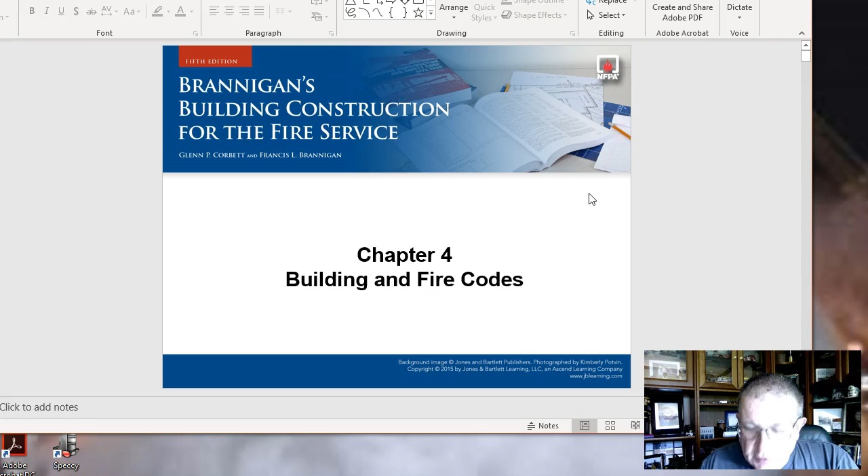Chapter 4 is about the building codes, and one of the things you got to keep looking at in Chapter 4 is all the different histories that go on with building codes and the basis of the building codes, and explains the difference between the fire and the building codes. There is a difference, and the construction codes and how they all have an impact on the fire service.

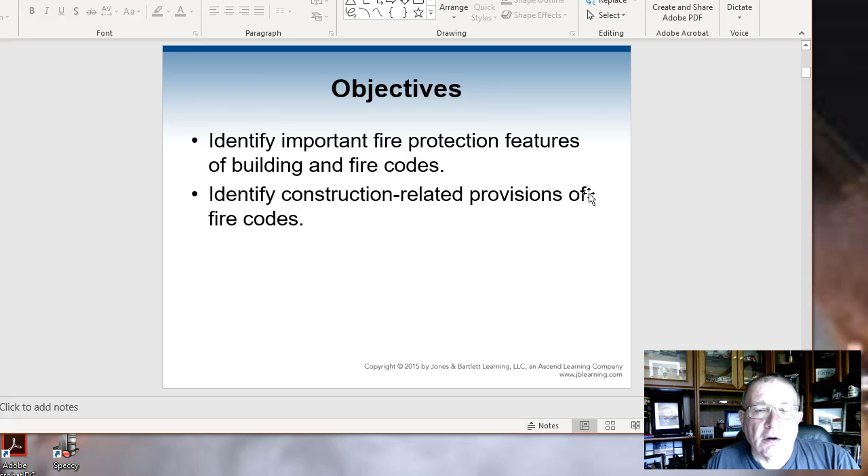Objectives are pretty much the same. The fire protection systems and building and fire codes are all about basically saving lives and living in an environment.

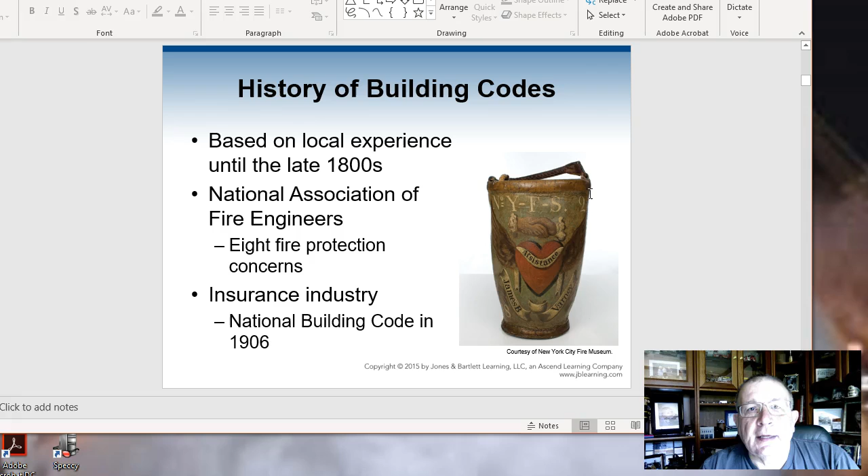The building codes history goes back to the late 1800s. The National Association of Fire Engineers and eight fire protection concerns all came apart. But the biggest thing was the insurance agency realized one thing, that they need to have a code that makes sense. So the model codes were developed, and so came about the National Building Code, the Uniform Building Code, the Standard Building Code, and of course out of all that came the International Code Council, which exists today.

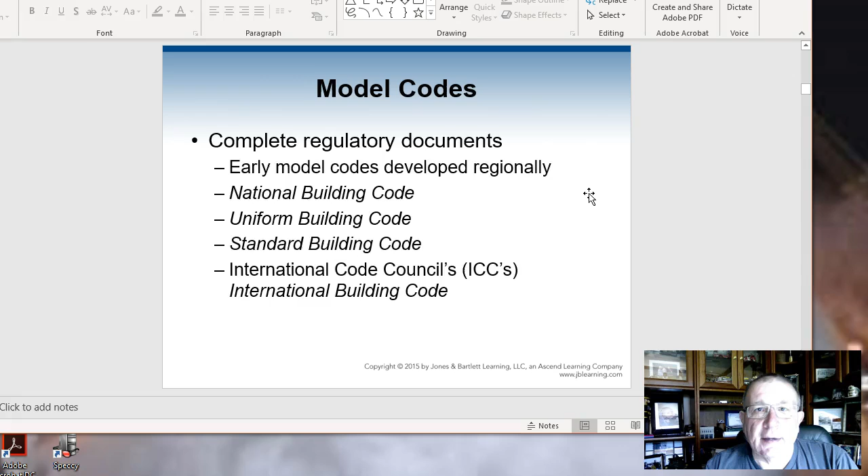Older codes were regionally adopted, but are no longer produced. Fire codes today generally have an update every 3 years, and they're all based on the standards. And if you know about the standards, it comes out of NFPA and the various testing agencies that support those standards.

Fire code regulations are to be employed on the fire service after the building is built. Basically, I tell everybody, we never get a divorce from a building. We inherit it till the day it goes on the ground. And I think the biggest thing I can tell everybody is that if a building is built bad from the beginning, the fire department always has to deal with the inspection headaches that go with that building.

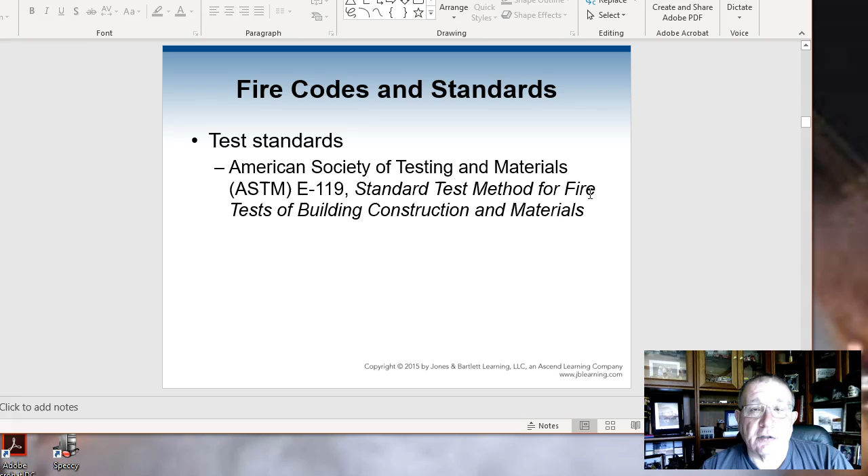And again, the fire codes and standards are updated every 3 years. Testing standards is the American Society of Testing and Materials. ASTM E119 is the testing method for all construction materials, but it does change by standard of testing.

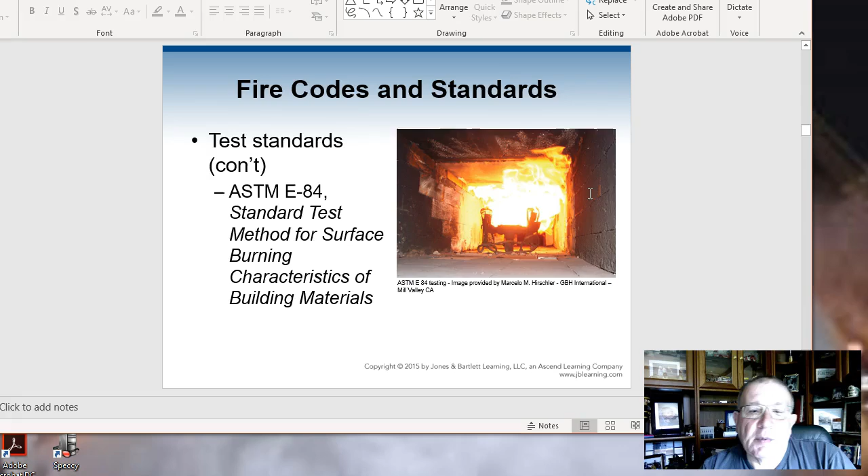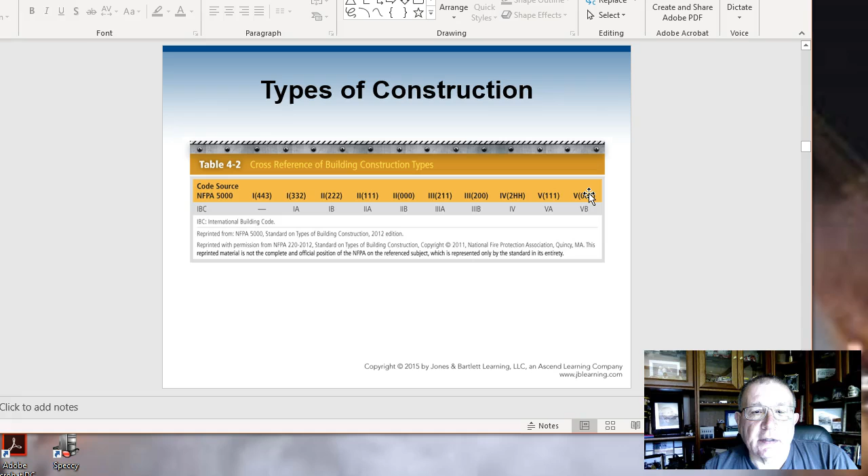ASTM E84 is the fire surface, or the surface burning characteristic, and that's also used to determine what type of building materials are out there. Construction codes have come into the International Building Code, NFPA 5000, and of course the hybrid buildings that are out there. This kind of gives you an example of the codes and the references, and I direct you to the text on that.

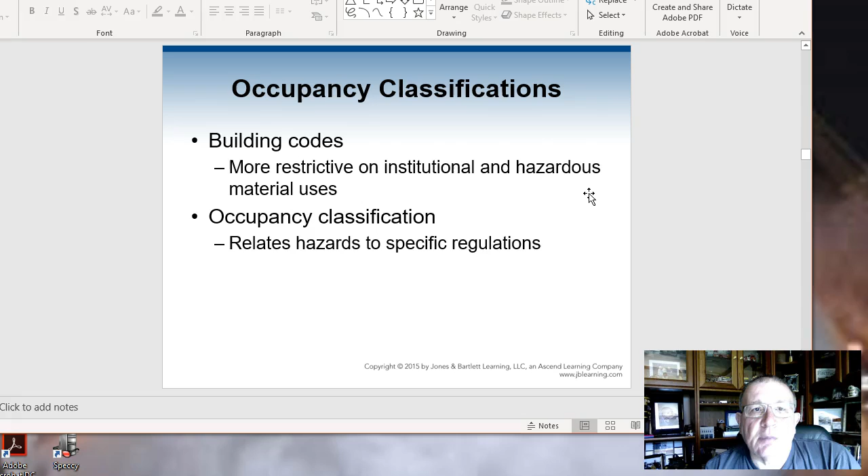Occupancy and classifications of building codes, and how are they employed by the occupancy and the type of building that's being built. You got to remember A1 through A4, B and E, E being educational, B business, F1 and F2, and then H1 and H5 being high hazards.

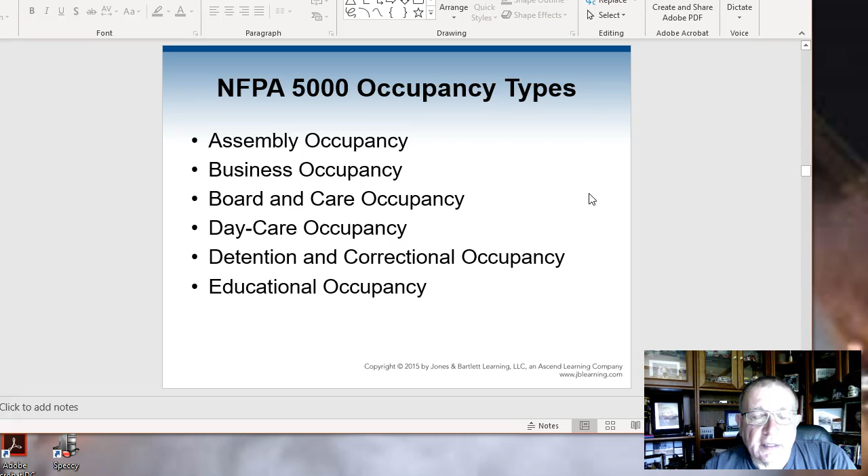But the biggest thing is A is for assembly, B is for business, D is for daycares or detention and correctional occupancy, and E is for education. 5000 types are healthcare occupancies, high hazard contents, industrial occupancy, mercantile, residential, and storage.

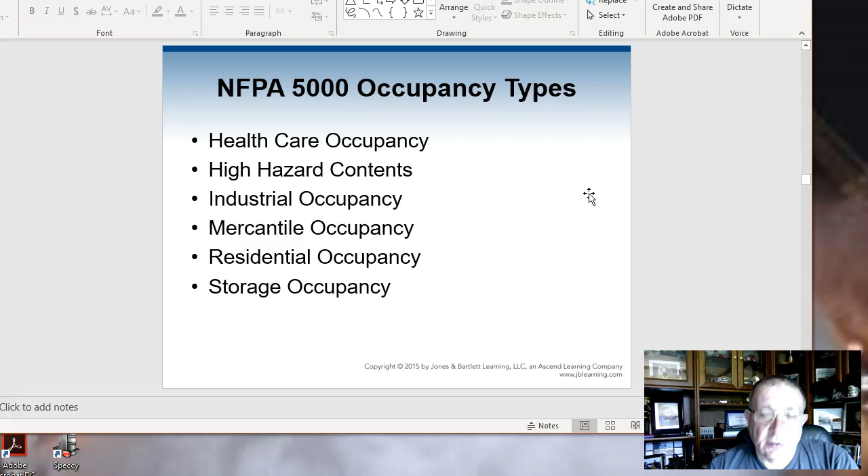Building height and size are required under various codes, and also local zoning controls the height of the building. So don't forget that.

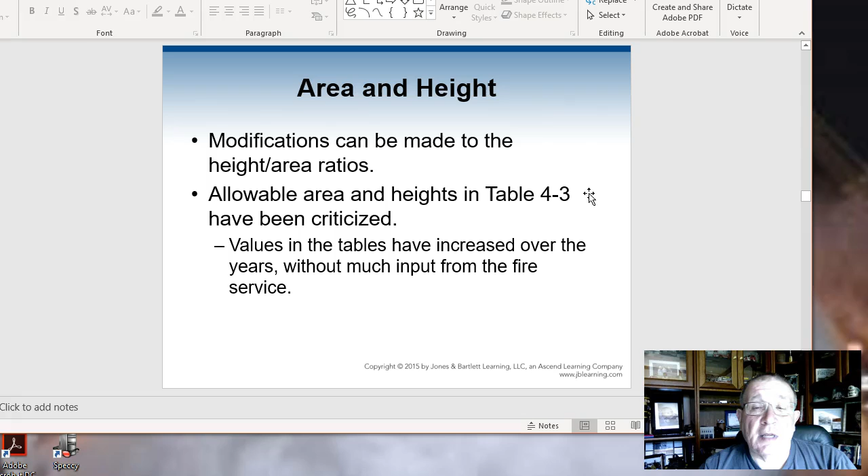Modifications in the tables that are there. One of the things that's changed in the building code that I can tell you right now is we're now building high-rise buildings again, more than 4 stories. Most you'll start seeing 6 and 8 story buildings being built out of wood construction.

Table 4-3 kind of lends you to how the construction type is, 1, 2, 3, 4, and 5, and the hour rating as needed.

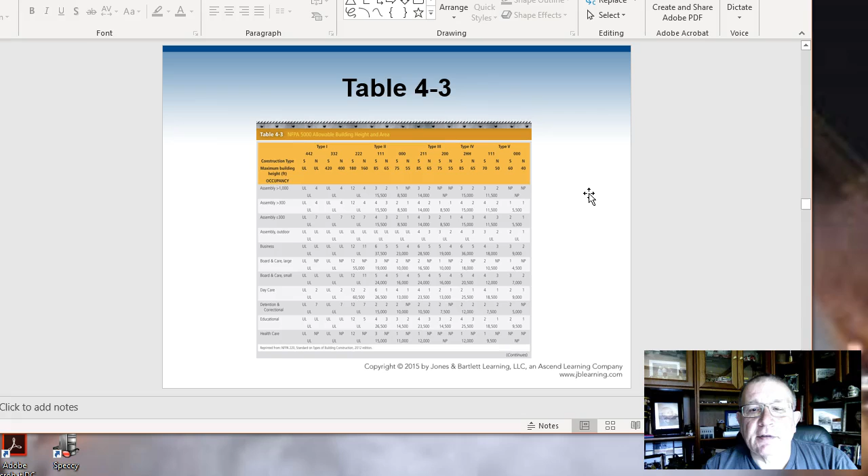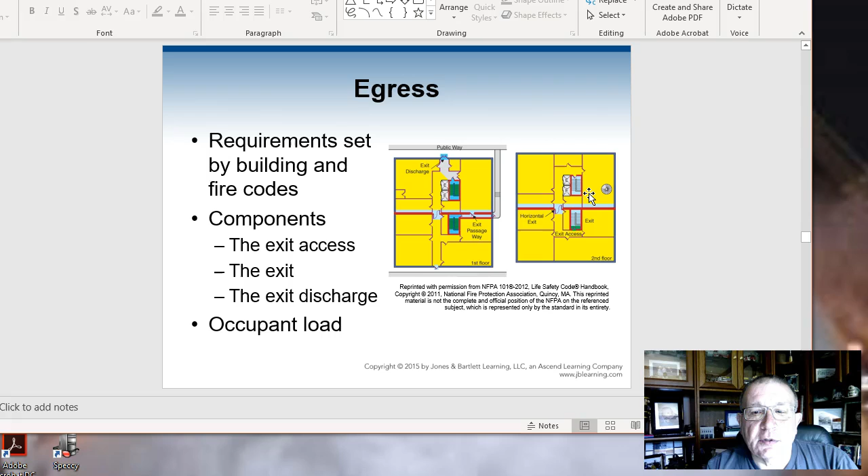One of the biggest things is special hazards. You have special structures such as atriums. You got your high-rise structures. You got your open mall spaces. You got egress issues with all these buildings. What's a good way for the flow pattern out of the building? But more than anything else, you have to look at the occupancies, how they're rated in the building, and the type of load that occupancy can handle.

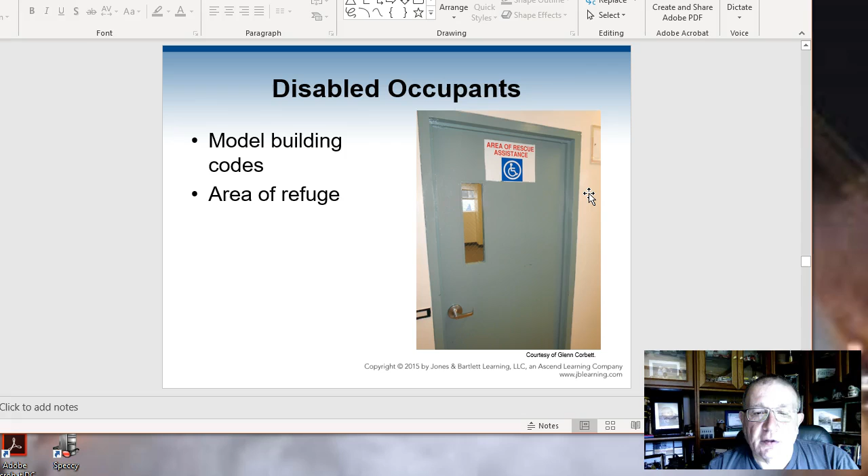Areas of rescue assistance are there, but the biggest thing you have to look at with all this is what is the purpose of the building and how are people going to get out.

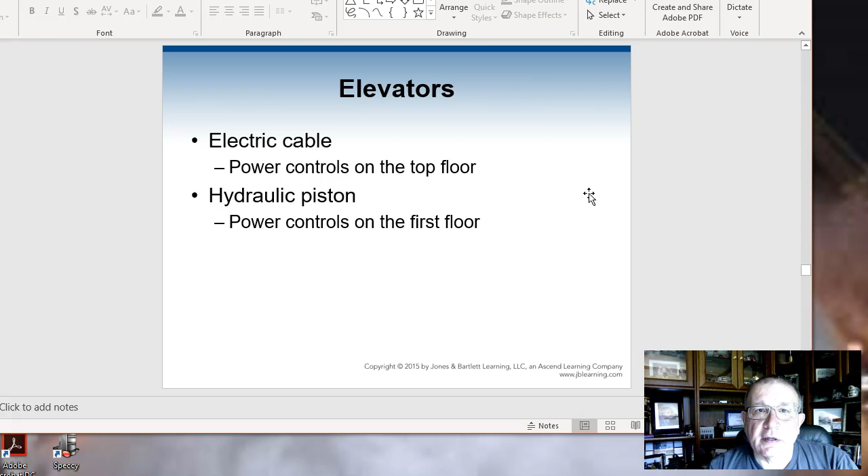Again, fire protection systems, the way that goes. Elevators are key. Is it a hydraulic elevator or electric cable? It all depends on the height of the building and the purpose of that elevator. You're not going to use a cable elevator on a 4-story building, you're going to use a piston type. But you're going to use a cable elevator on a 6, 7, 8, or 10-story building.

Phase 1 operations is for recall. Phase 2 is for the fire department, so they have access to the upper floors.

Elevators, post 9/11 changes: occupant evacuation elevators, illuminated usage signs, protection against water penetration, two-way communications, and recall from a fire command center were all changes that happened after 9/11.

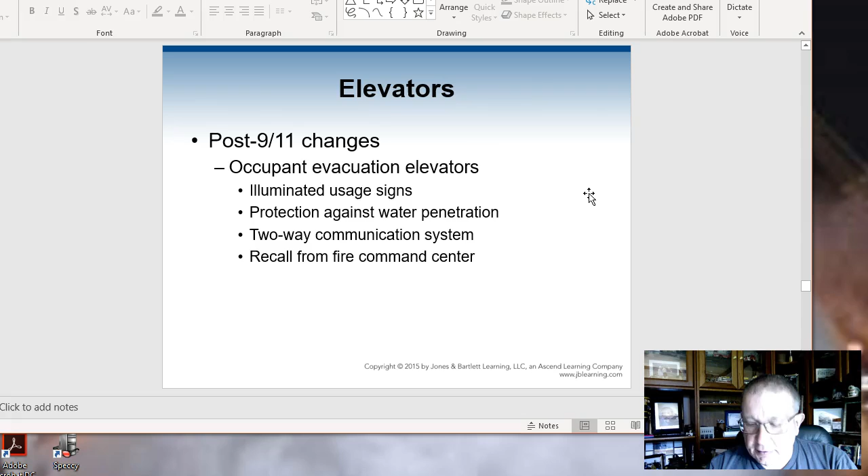9/11 also brought about eliminated hoistways, a minimum 150 square foot lobby, and class 1 hose outlets in the stairwells.

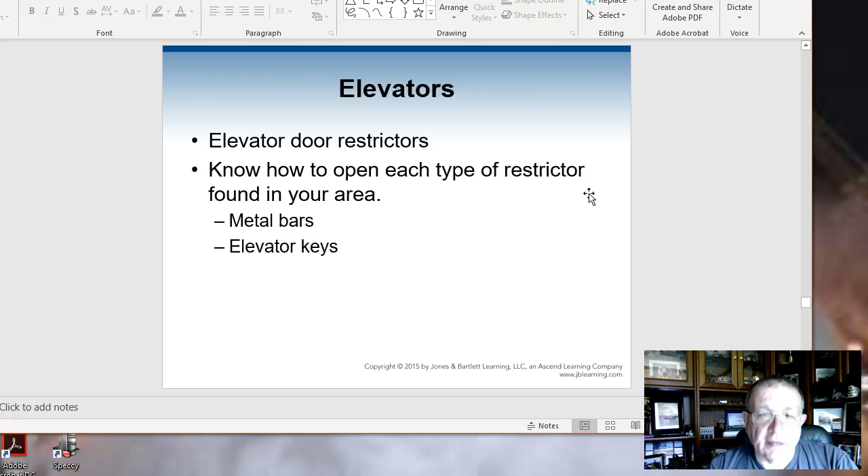Elevator door restrictors. You need to know how to open each type of restrictor found in your area: metal bars, and elevator keys. The building code itself provides a lot of good information, and I direct you to read that.

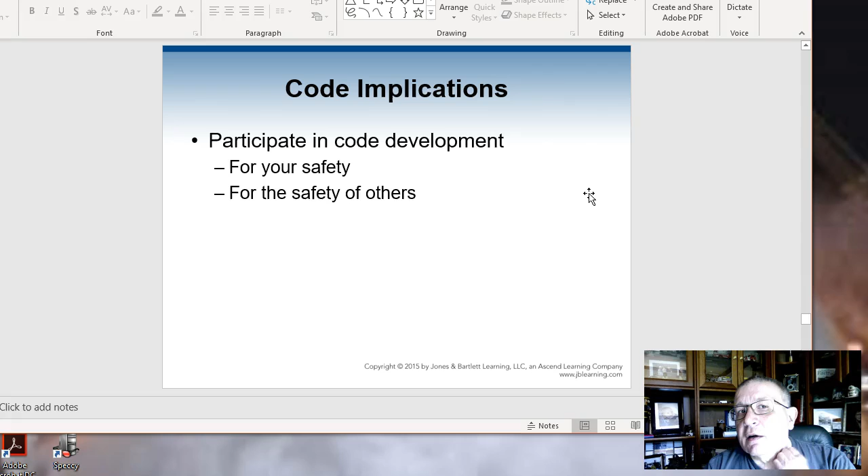And code implications. What happens when the code doesn't address your concerns? You have to go through research, and what you do with that is assess the proper code to the NFPA findings and how that comes out through code, fire code regulations, and also through the standards. The standards sometimes dictate how the code has to be applied.

So in chapter 4, you're looking at what are the subsequent regulations and what's going on and how they've been applied in towns and cities. This is a good example, quite frankly, of a quick summary of what you're going to see in this chapter. You need to read the chapter and understand what you're doing here.

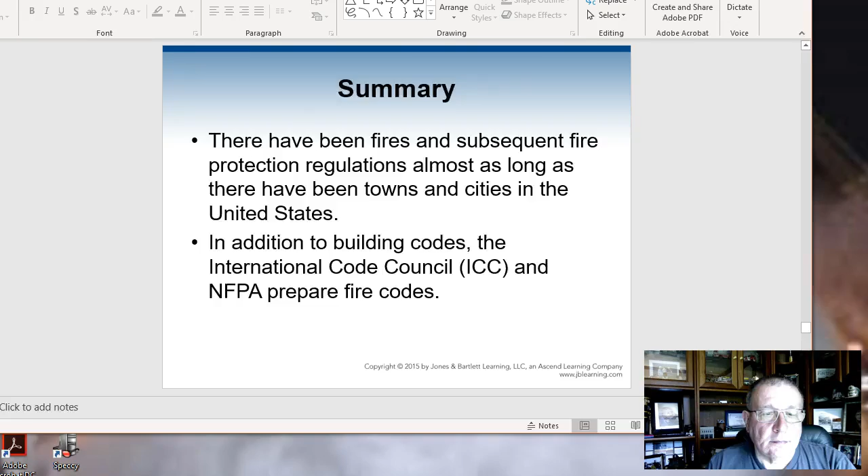Okay, we're going to start out with chapter 5 here, fire behavior and building construction. It's pretty much an add-on to what we dealt with in chapter 4, but you're going to start looking at some things a little different.

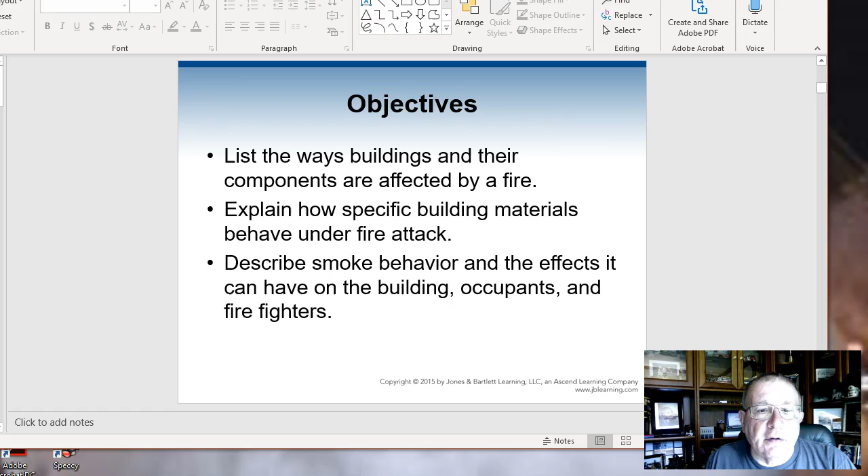The objectives here are the fundamental behavior and the key to fire phenomenon. The big thing here is to list the ways buildings are affected by fires and the specific materials that behave under attack of fires. So we go into basically the fire behavior elements here.

I'm not going to get into a long lecture on this, basically this is in your book. But the heat transfer is really important. This is a good example of conduction, convection, and radiation.

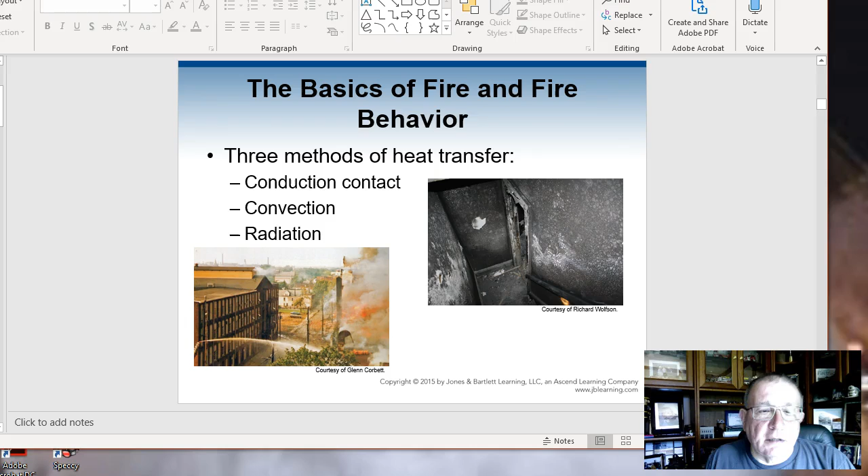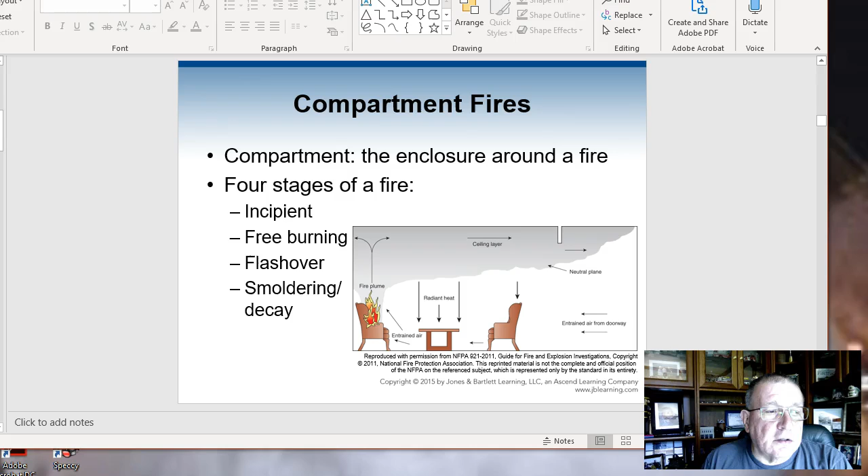Compartment fires basically involve the incipient free burning phase, flashover, and smoldering decay. So those are key elements that you're going to see in the basic concepts of fire behavior.

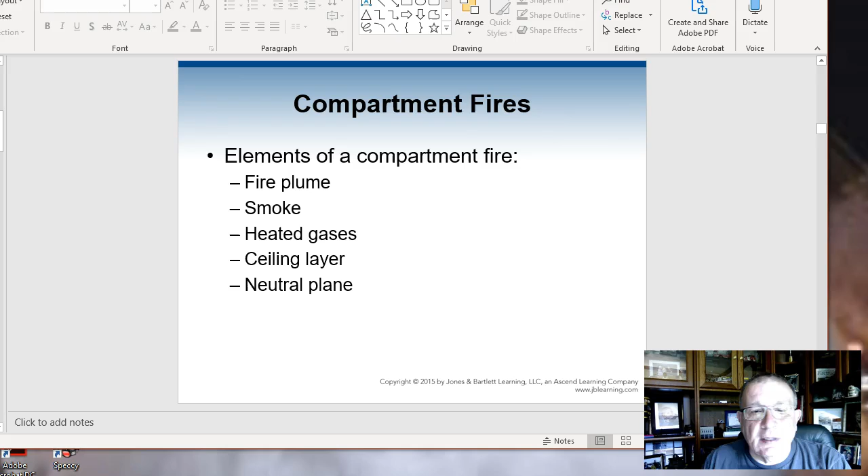One of the big things you have to look at is a fire plume, smoke, heated gases, ceiling layer, and the neutral plane. So when we look at these things, here's a good example of a working fire in an apartment building.

But the big thing is, more than anything else, you must consider all the tactics that go along with fighting compartment-type fires. You've got to look at the interior combustibles, the vertical openings, the height of the room, proximity of walls with each other, and HVAC systems.

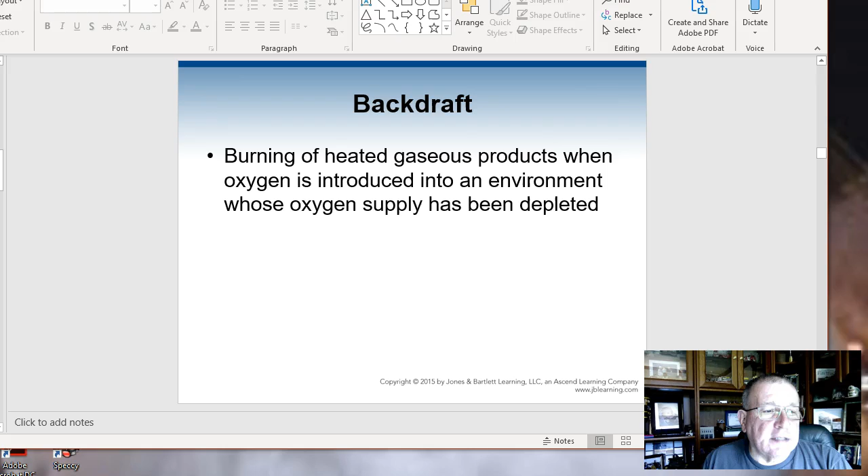Today's fire service, I will tell you this right now: in lightweight construction, it doesn't matter if it's steel or wood, anything lightweight construction. The rapid spread of fire in a building like that leads to one thing, a rapid collapse, and you've got to be very careful. You've got to understand that those components are combustible enough that they can turn around and deteriorate right in front of you, and as an entry crew and a firefighter, you could have a very dangerous situation.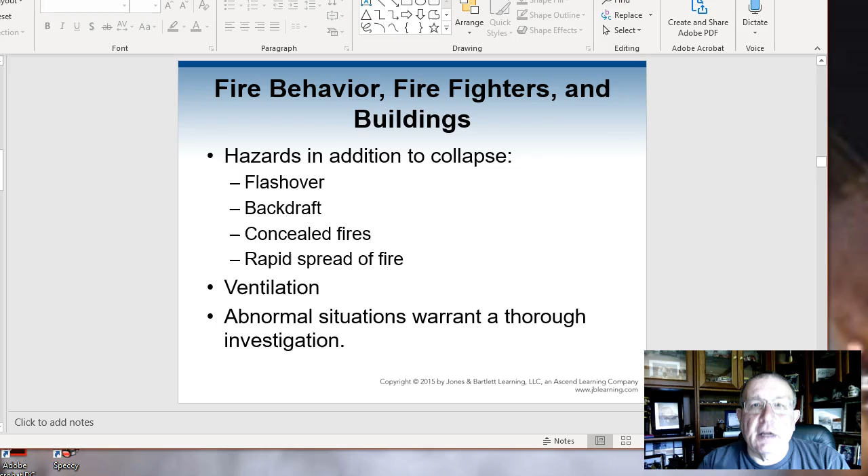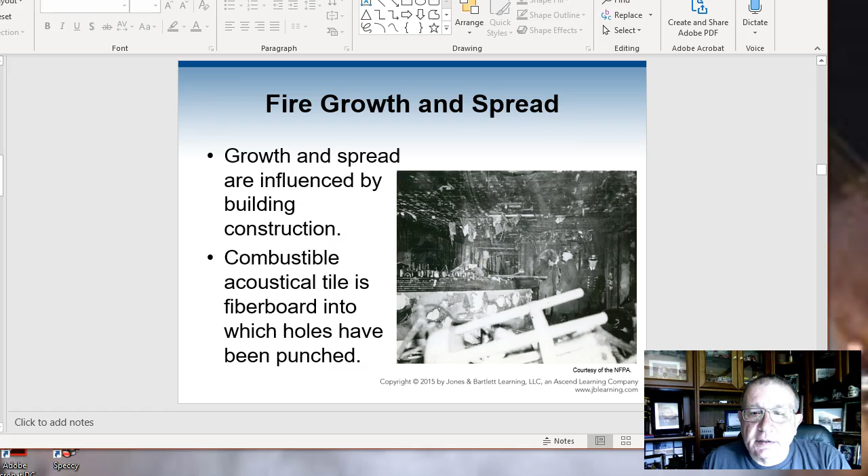This kind of gives you an idea of what happens when fire grows and spreads. This is the aftermath that you'll see, a picture of basically what happened after a fire there. In your book, you'll have the MGM fire, you'll also have the famous Coconut Grove fire, how fast that fire grew and the loss of life that went along with it, along with Beverly Hills in 1977.

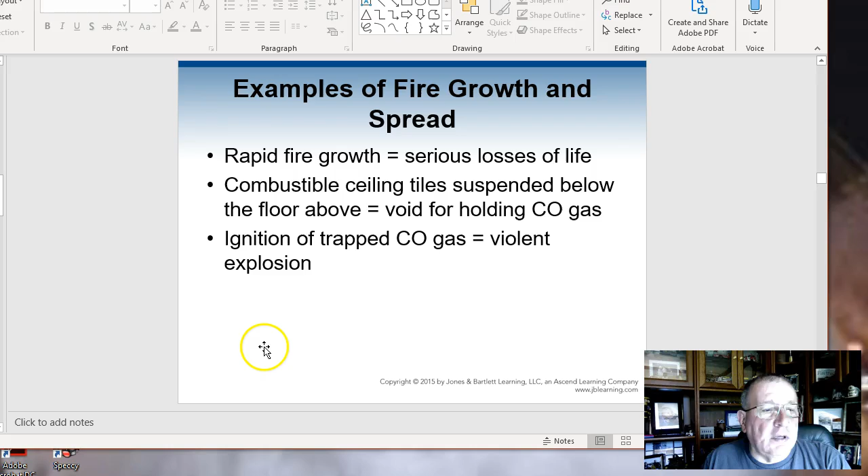You got fire hazards, and the list goes on. As you go through this, you look at your finishes, and you're looking at more than anything else why some of this comes back. Years ago, the big tents were put up with fabric, cork, rattan, and wood, and then they have a fire breakout, and people are dying because it collapses very quickly.

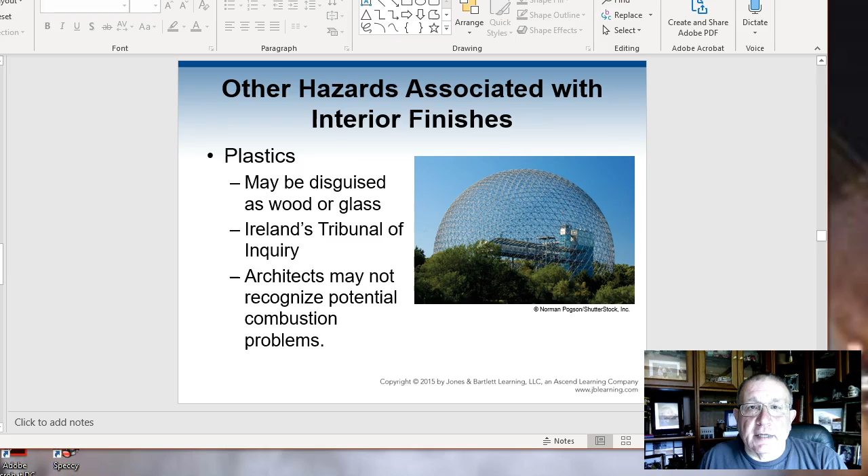Plastic is now one of our biggest problems. If you're looking at hydrogen cyanide, it's just generated from plastics. It's thick, it lays in the air, but you also have SO2 and other sulfides that come about from incomplete combustion. Look at the woods you see today or the cosmetic furniture you can buy. I hate to say it, at places like IKEA or any furniture store, there's a lot of plastic and polycarbonates involved.

Here's a good example of a Cold Storage fire that killed firefighters in Worcester, Massachusetts in 1999. This was caused by vagrants in the building. It was an empty building, but yet we lost 6 firefighters.

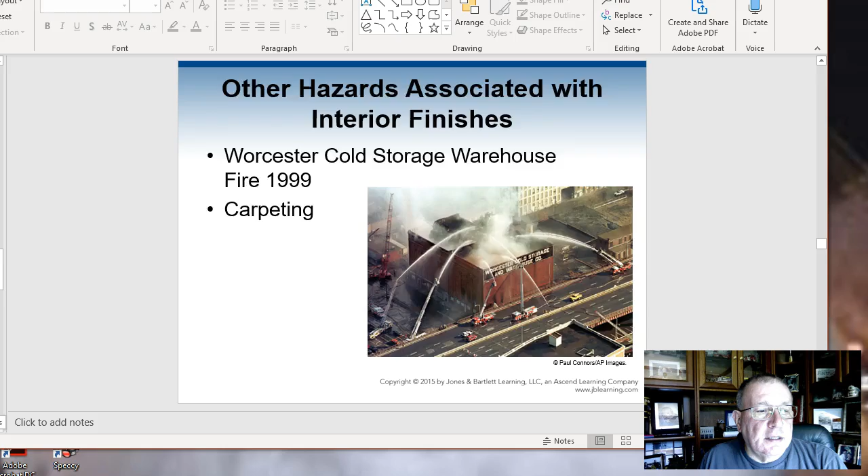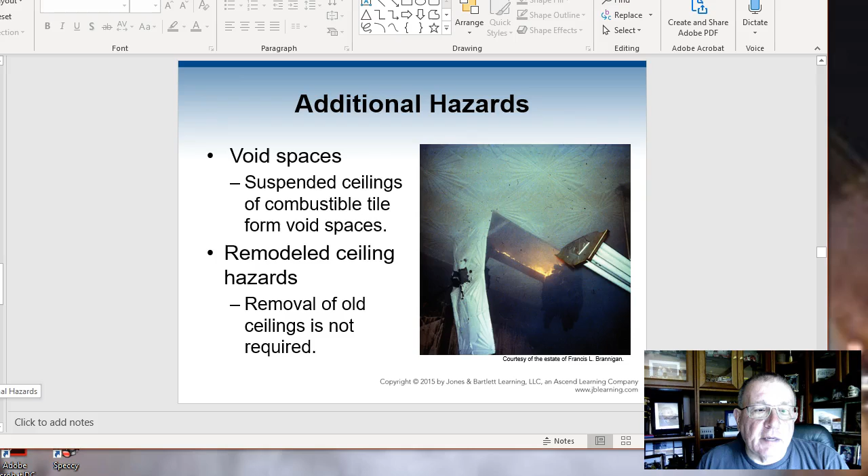In the case studies that I present to you in this whole array of building construction, it's always centered around a line of duty death. And the reason why is because mistakes are made. I'm not here to point the finger, I'm not here to say this was right or wrong, but I'm pointing the finger at the building. So when you start reporting on this, start thinking about the building and what happened with the materials. You'll be surprised how sometimes we just walk away and don't even look at what we just walked into or walked out of. We get blinders on.

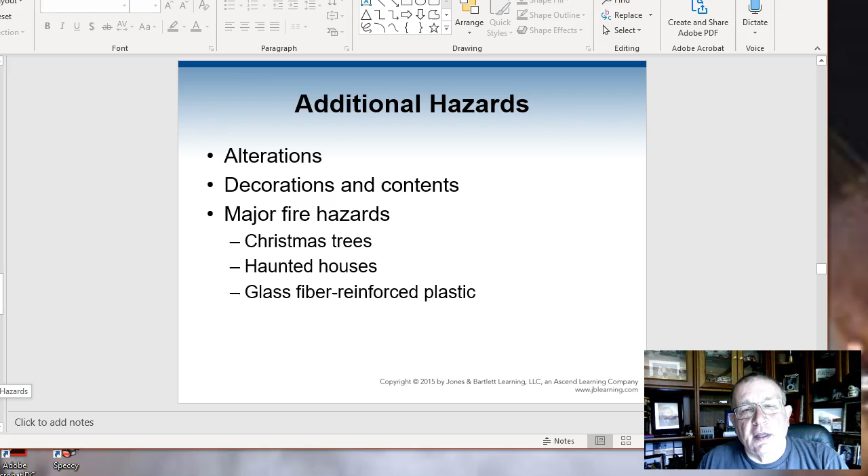Today's office buildings, you got a lot of cubicles going on. So the big thing is now you got additional hazards with decorations, Christmas trees, people making haunted houses, glass reinforced plastic in the houses and that. But today's fire load and the heat of release is greater today than when the fire codes were basically put into written form. First Interstate Bank fire, hotel remodeling, regulations in California, Boston, and the Port Authority of New York and New Jersey all have different takes on what they want to see in their fire protection.

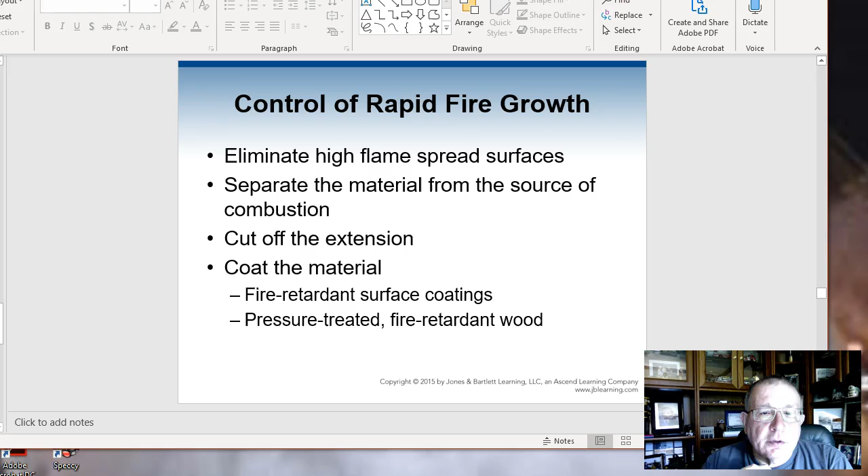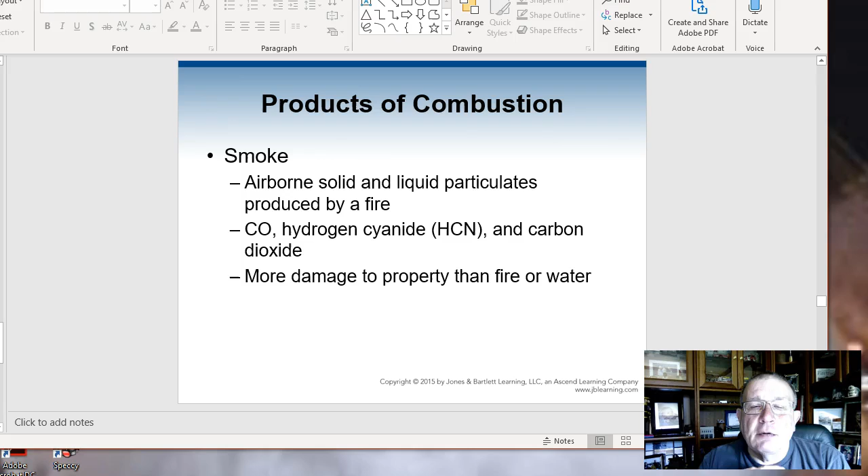Control of rapid growth is important, but the biggest thing, more than anything, is know your products of combustion. Smoke tells you a lot. Airborne and liquid particulates produced by fire, hydrogen cyanide, carbon dioxide, CO poisoning. More property damage can be done with water than with fire.

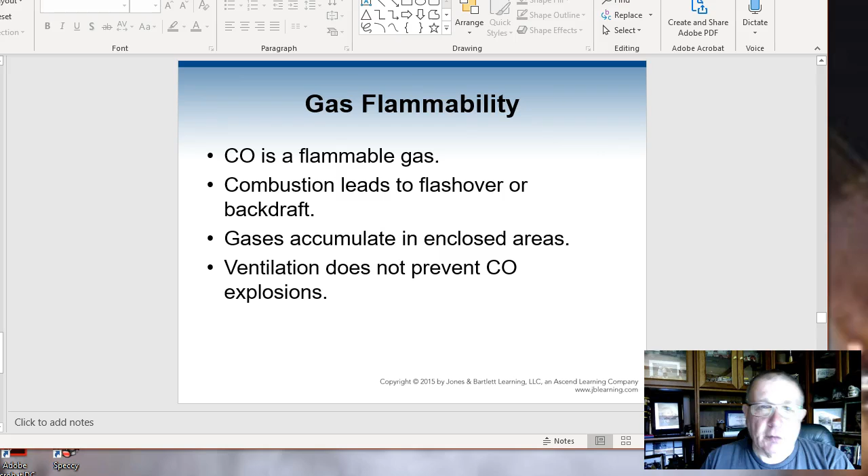CO is a flammable gas taken to the right ignition temperature. Combustion leads to flashover and backdraft. Accumulated gases in the closed area of ventilation do not prevent CO explosions. You got to look at this. You got to ventilate a structure the proper way. You also got to look at what's burning, and how these gases are going to build up on you and how quick they can turn the tide in a structural fire.

You got to look at the physical effects on people. CO is odorless and tasteless, and smoke particles can prevent air from filtering through properly, causing people to lose their sense of direction, and so on and so forth. Smoke damage may be the most expensive byproduct of fire. It's everything. You have a smoky fire, everything's basically destroyed.

Contamination by radioactive material, polychlorinated biphenyl, PCBs are very dangerous and very costly to clean up. A nuclear plant in Hanford, Washington, the cleanup probably costs more than the plant itself, all because of the toxic effects of PCBs.

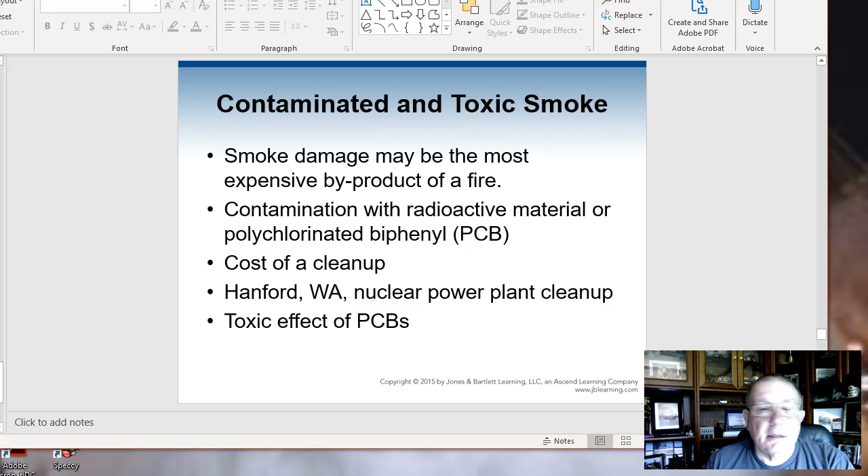Summary: fire behavior is critical for all firefighters. The biggest thing is that you have to look at the associated risk with fire growth, high flame spread materials. Biggest thing is, more than anything else, look at the strategic events of a fire, how the fire has grown and where it's going and what's going to happen.

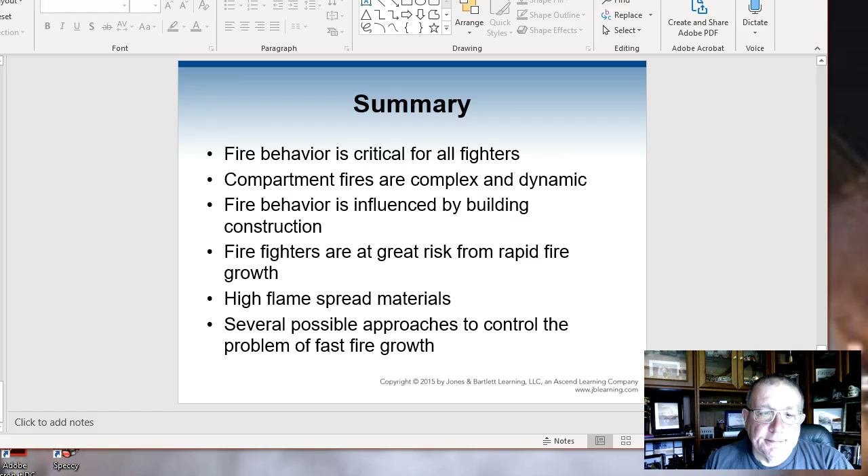This is chapter 5. Chapter 6 is a very long PowerPoint slide presentation, and I'm not going to go through the whole thing.

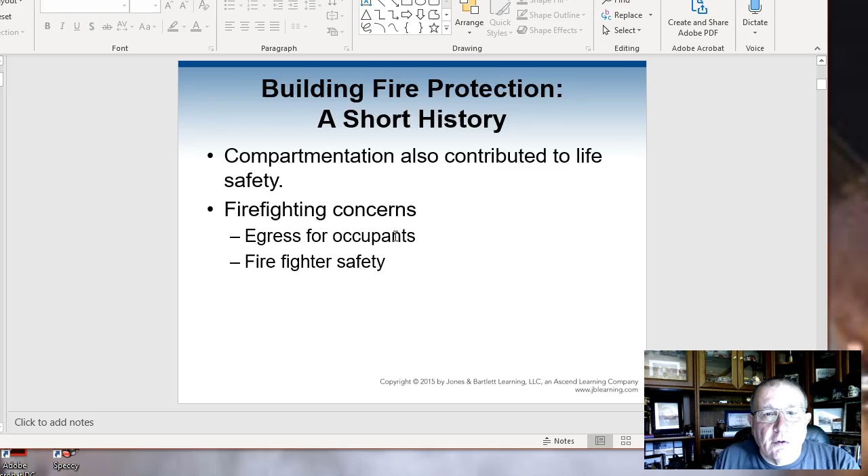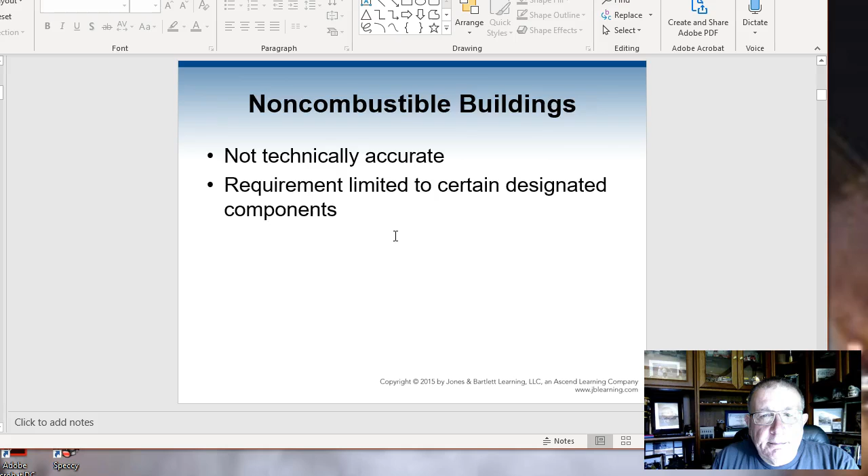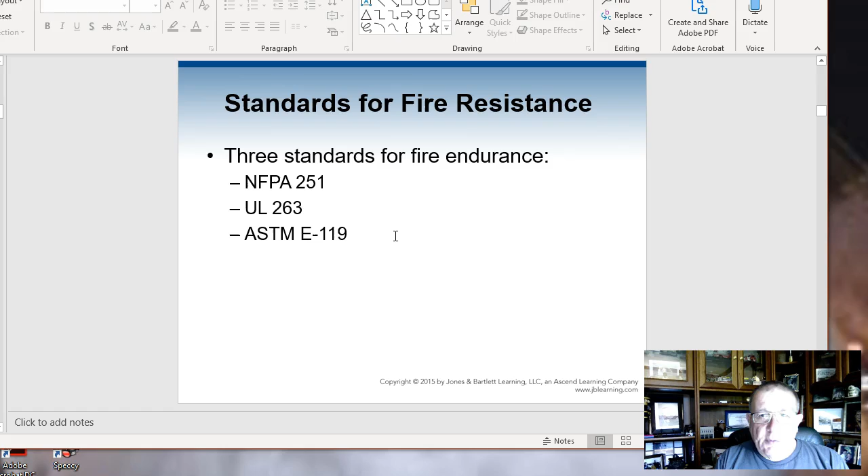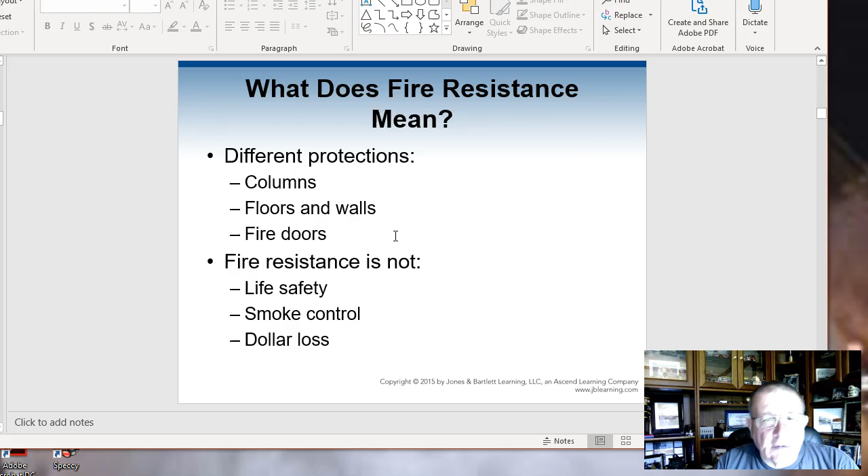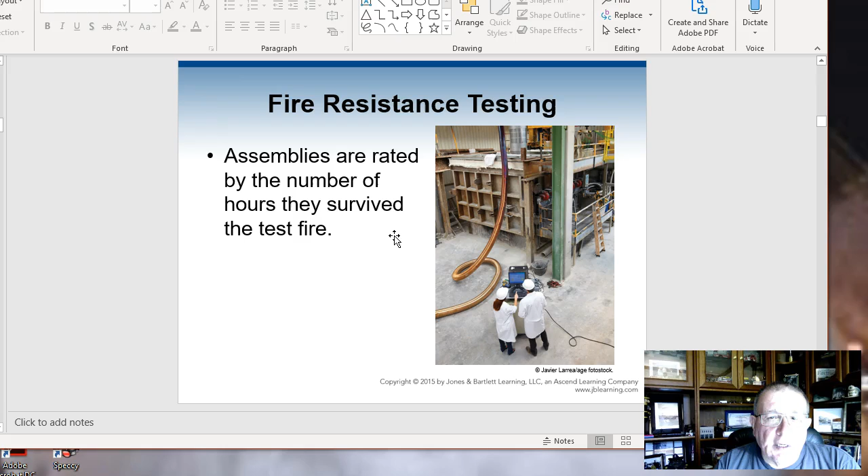Columns, floors, walls, beams, fire resistance, life safety, smoke control, dollar loss, everything is important. There's a good slide in the book, slide 18, in regards to fire resistant testing and how things are done, and it gives you a good example where that goes through.

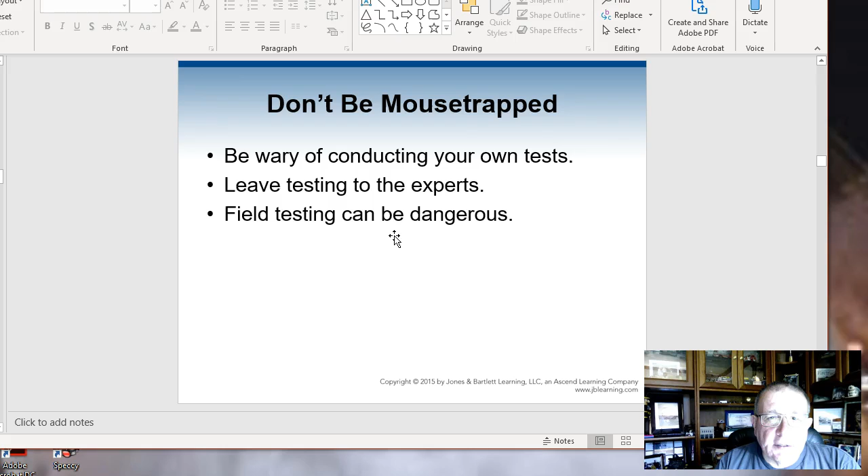The big thing is, as I go through this chapter very quickly with you all, this is just a snippet of what you have in this chapter. You have to look at fire containment systems being installed, fire dampers. Buildings have fire dampers in them. There's a massive amount that goes into the ductwork in regards to the HVAC, so it can stop the flame spread of fire through a duct system.

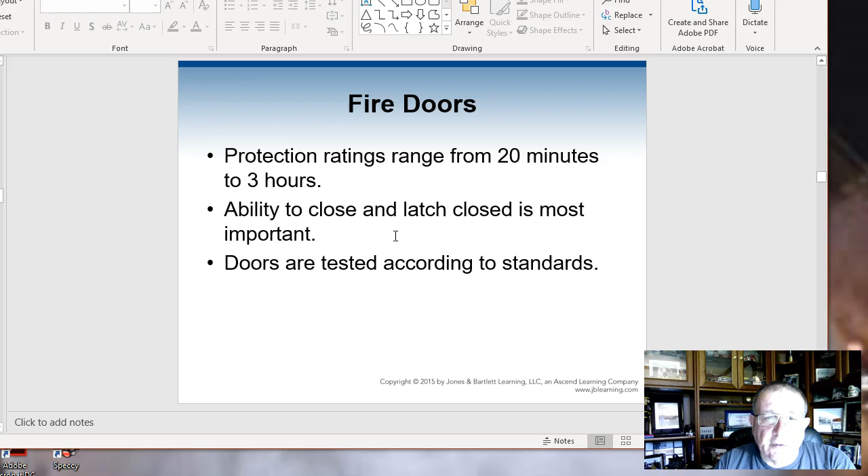Fire doors have to be rated, and they need to be in any commercial structure. Generally, you'll see fire rating doors at 2 to 3 hours. A good example is a swing door like this with panic hardware on it. Big thing is overhead doors and rolling doors. These are all part of this, and so is the closure on the building.

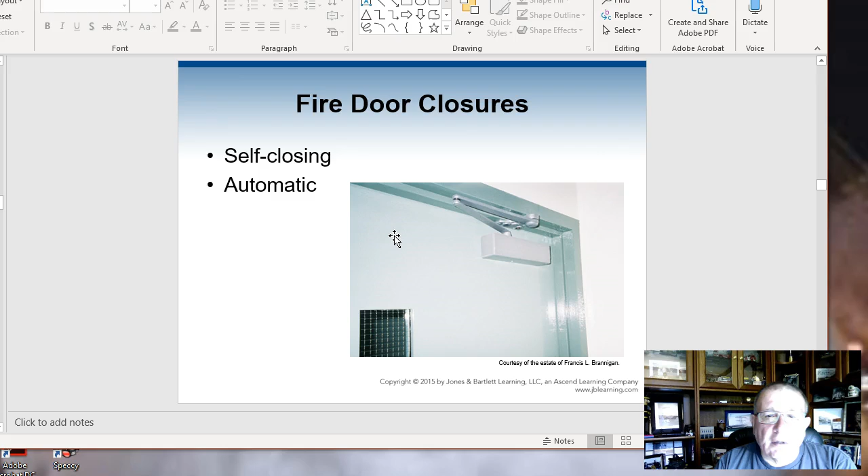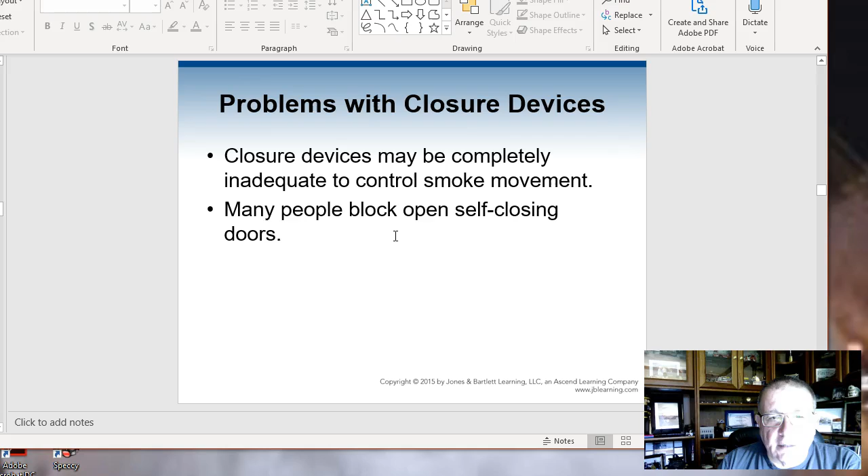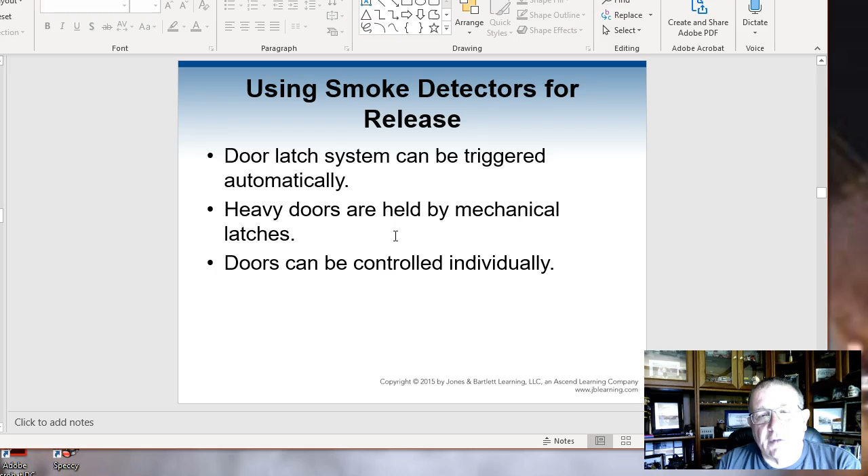So you've got all these to deal with. Problems with closures - what happens generally in a real smoky environment is they become sticky. They stick and are hard to open up. And sometimes people block open self-closing doors. The problem with that is when they block it, it makes it very difficult for the door to react the right way, what it's designed to do.

The other thing is stairwells. People like the little wedge things in stairwells and put stuff underneath the steps. Case in point, it's all part of a system that can't endure storage underneath of it. It's designed to stay open so that it's free of any type of fire threat.

You have smoke barriers in buildings, and most buildings today are now smoke-free under the laws. So we have all that. Escalators are important - you've got to understand what they do, and you do the compartmentalization.

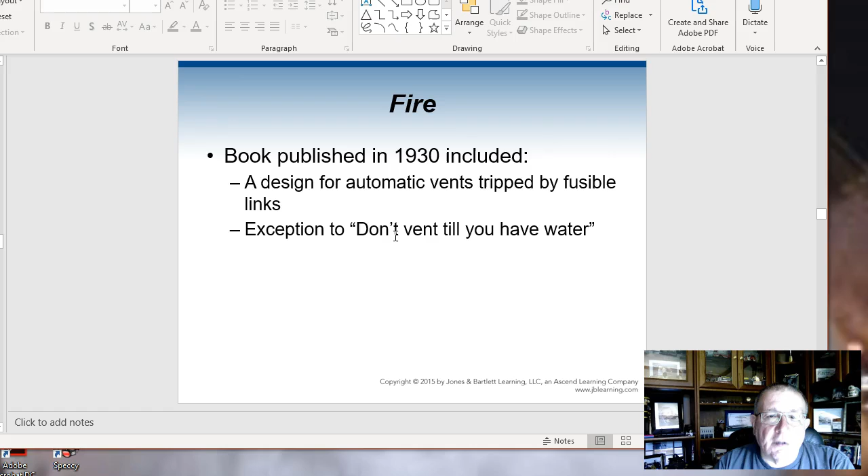The book published in 1930 was called Fire: The Design for Automatic Vents Tripped by Fusible Links.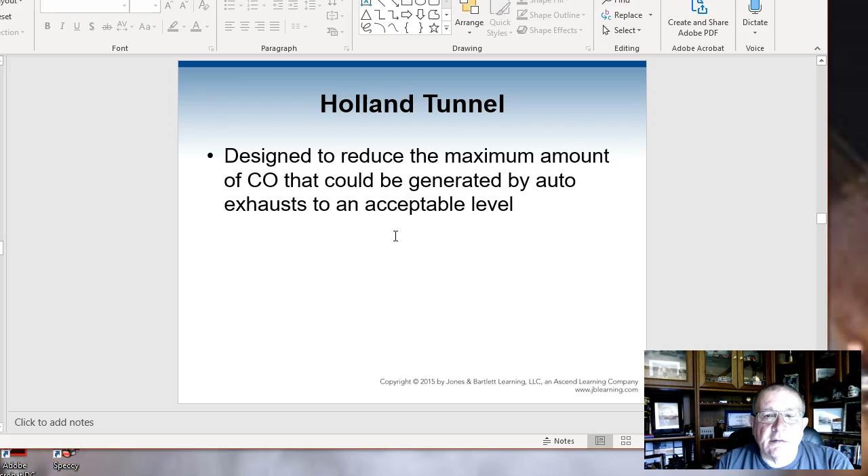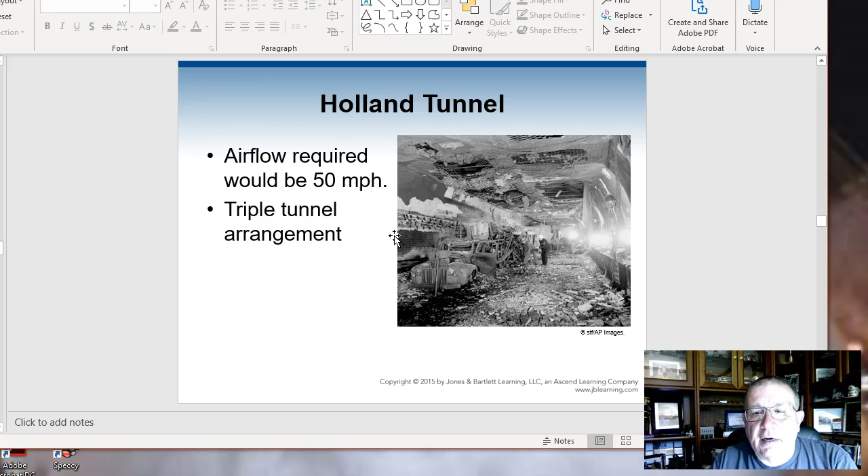Big thing is the Holland Tunnel. There's some interesting comments about the maximum amount of CO to be generated by an automobile and what was the acceptable level because of pressurization. Here's a good example of what happened in the Holland Tunnel. It required an airflow of 50 miles an hour, a triple tunnel arrangement, and they had a fire and basically closed the tunnel, and it had to be redesigned.

The Eurotunnel is an extensive design. You have to look that up.

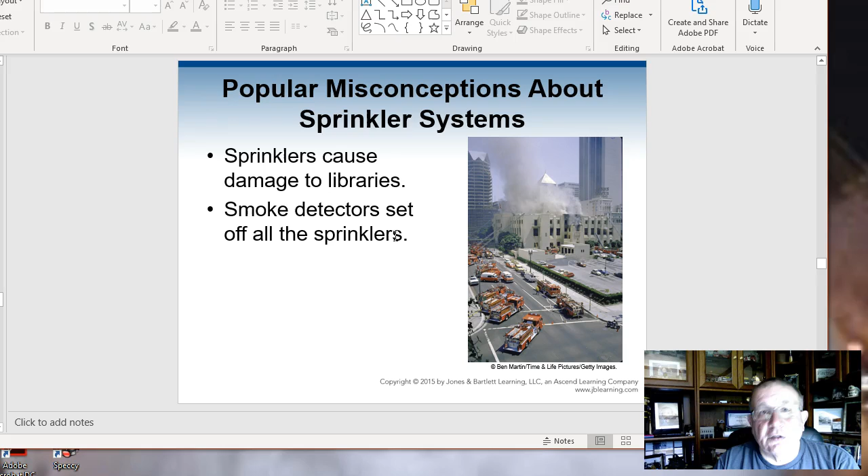Automatic sprinkler systems and the type of sprinkler systems that are out there, and the pros and cons. Misconceptions about sprinkler systems: they cause damage to libraries, smoke detectors set off the sprinkler system. No - smoke detectors do not set off the sprinkler system. Fire sets off the sprinkler systems.

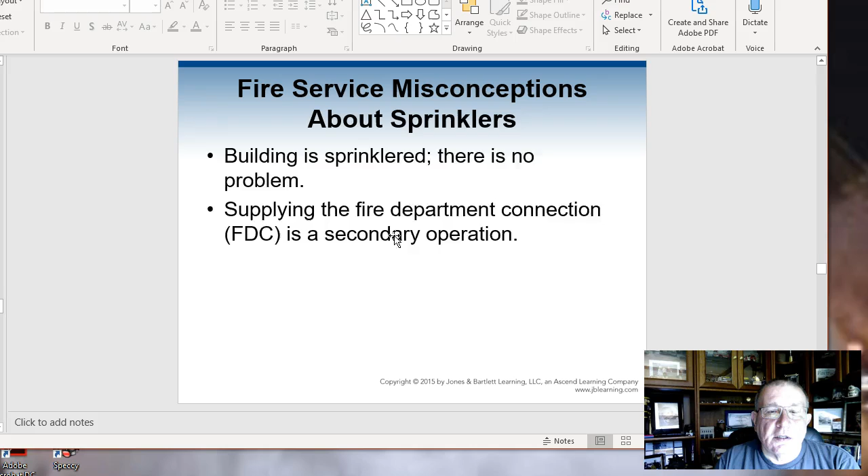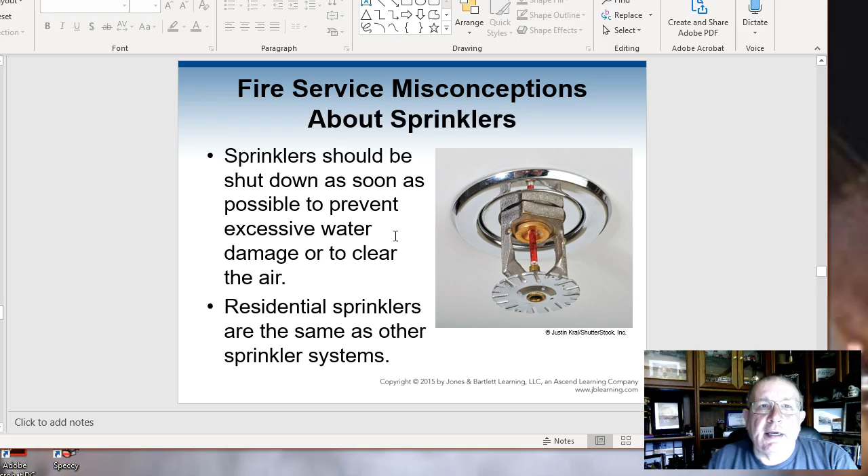The big thing about all this is when you look at these misconceptions that are out there, you start to understand that the sprinkler system is the most proven water suppression device that we have out there. Once used the proper way and in protection of an area, water damage can be managed. And now we have high pressure water systems, and we also have water mist systems. These are even proving out to be better than we've ever expected.

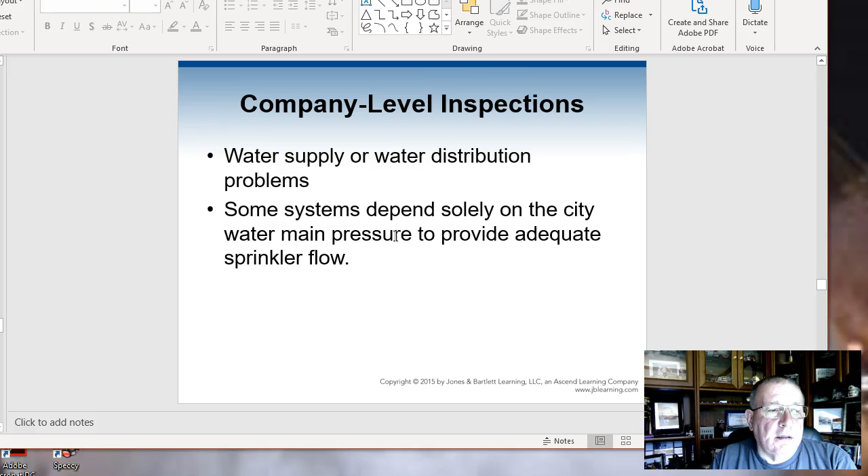Keep this in the back of your mind: department policies are important, company levels of inspections are important, how people have got to look at construction, high-rise building, preservation of historic buildings, and unsprinklered voids. Sprinkler fraud - there are a lot of people in today's world that want to think they're a sprinkler contractor, and they shouldn't even touch a sprinkler pipe or a sprinkler head.

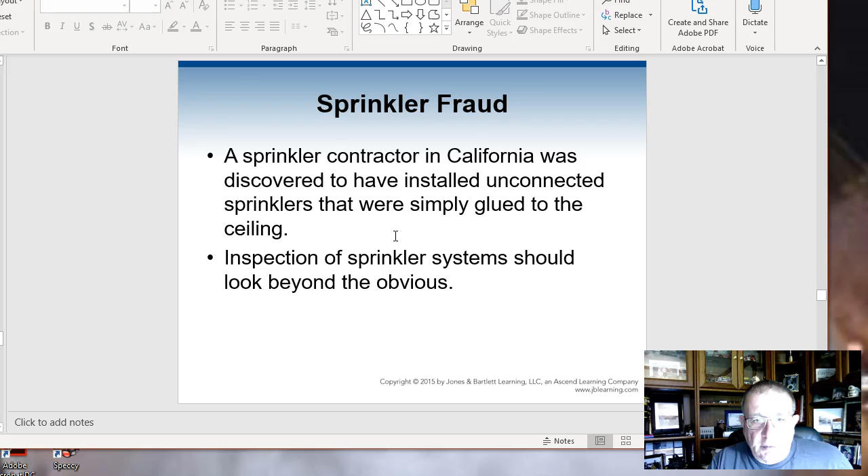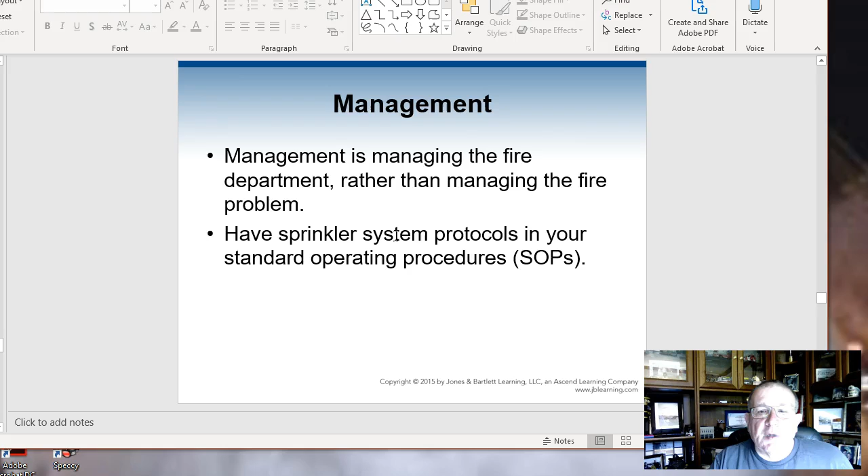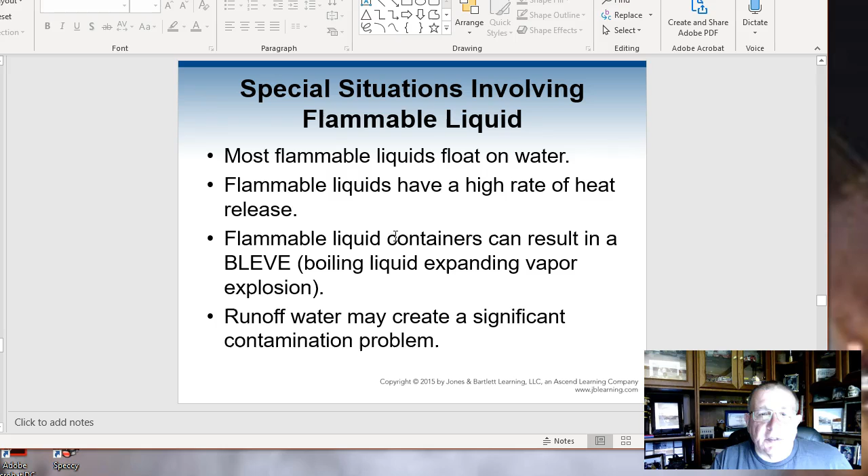Management is managing the fire department rather than managing the fire problem. Have sprinkler protocols in your SOPs - in other words, go look and see what the fire department has developed or needs to develop as far as sprinkler management systems on high-rise buildings and so on and so forth.

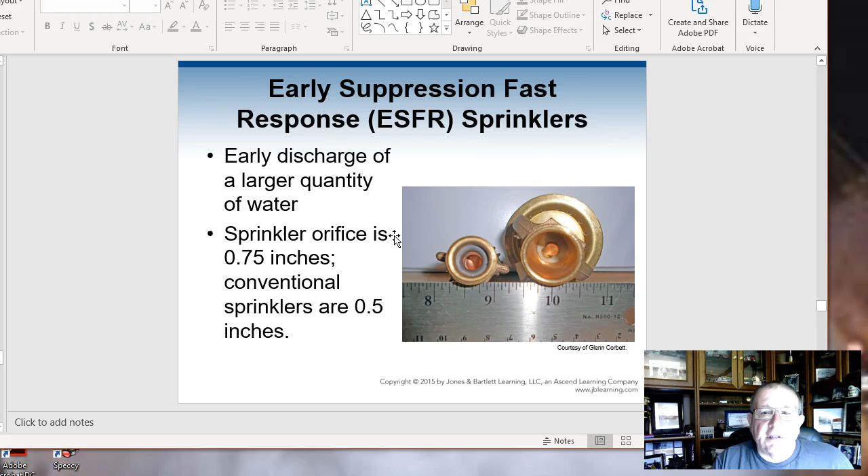A lot to go through here in regards to what they call ESFR systems - that's early suppression fast response systems. You also have standpipe systems, standpipe water, NFPA 72.

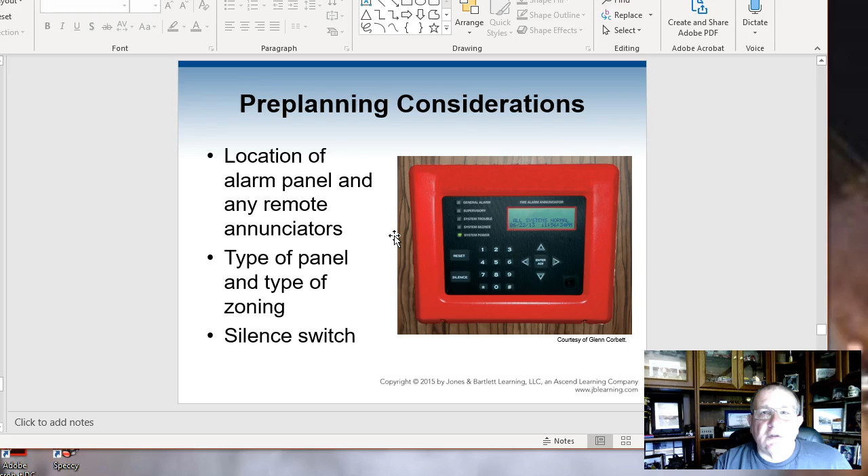You also have the codes from NFPA 72: initiating devices, panels, pre-plans, the type of communications device you're going to see. Most of what we have now is an addressable system that tells you where the smoke head number 202 is, and you should have a chart right there that tells you where 202 is to go find it.

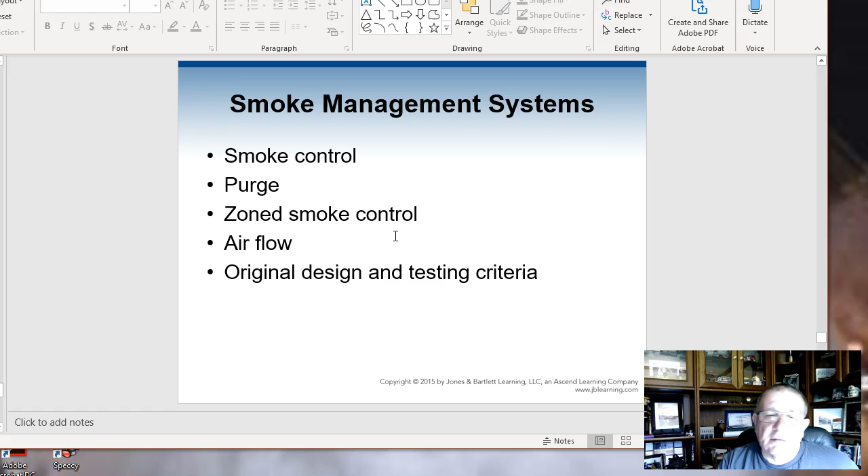Public address systems, smoke management systems - they're very important today. Smoke management systems have not only smoke control to purge the area, but also zone smoke control, designated airflow design with it, and it also gives testing criteria, how you do it. Control panels, pre-planning fire considerations - all these are important to you.

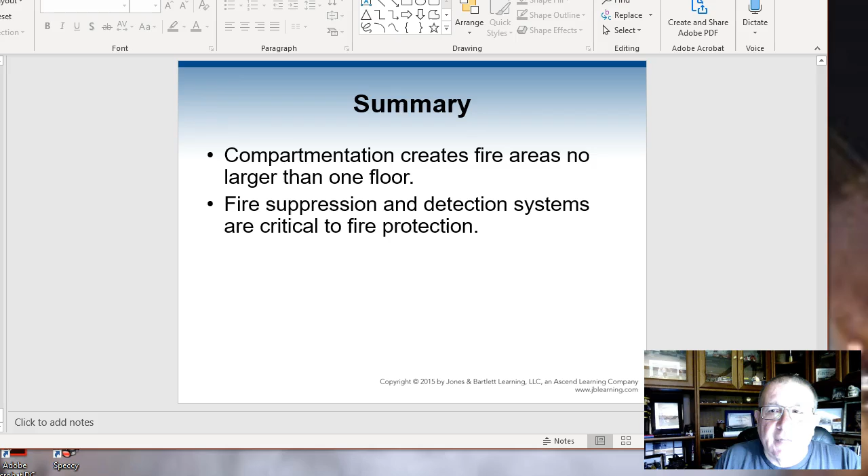This is a very brief overview of this chapter that you have. I hope you enjoyed it, and if you have any questions, by all means, call me.